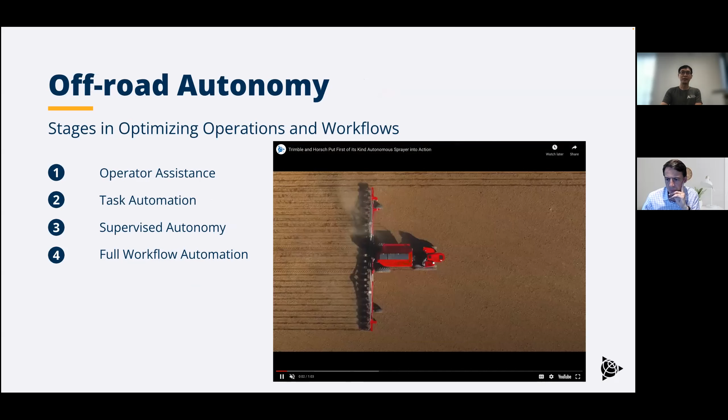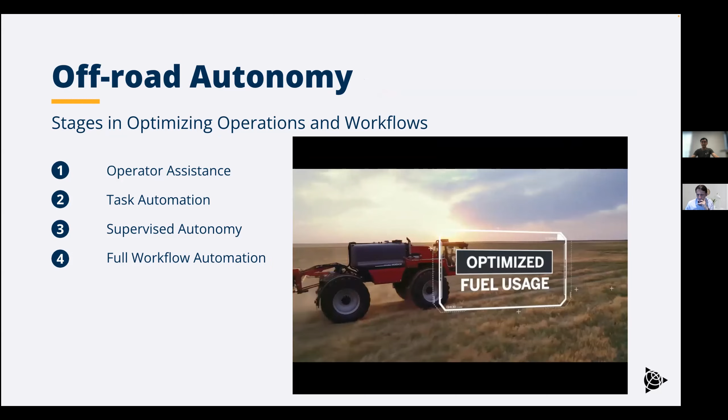So if we look at Trimble and where we stand, we look at autonomy not just from the vehicle's perspective—we like to look at it in terms of the workflow we can provide to our clients. Ultimately, we want to provide value by optimizing operations and workflows. At the bottom level there's operator assistance, which coincides with SAE level 1 autonomy.

Then we get into things like task automation—in agriculture, for example, automated spraying; for construction, automated blade control for grading vehicles. As we go higher up, this is approximately where we're at right now: supervised autonomy, essentially driving autonomous farming or construction vehicles to make the lives of construction workers or farmers easier. Ultimately, we want to tie that into our Trimble ecosystem for agriculture and construction—what we call workflow automation.

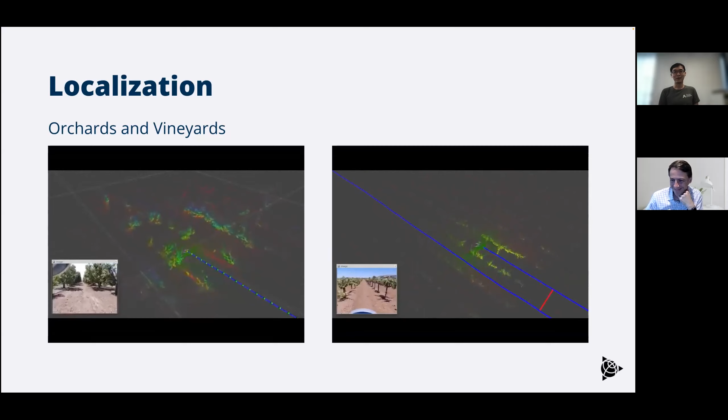So in agriculture, as I mentioned, Trimble has a large presence. My team does a lot of work in localization and perception, and a lot of the videos I'm showing today—I'm trying to avoid showing the corporate marketing videos and instead show you what the engineers are working with and the results we're seeing. My team works a lot on perception and localization.

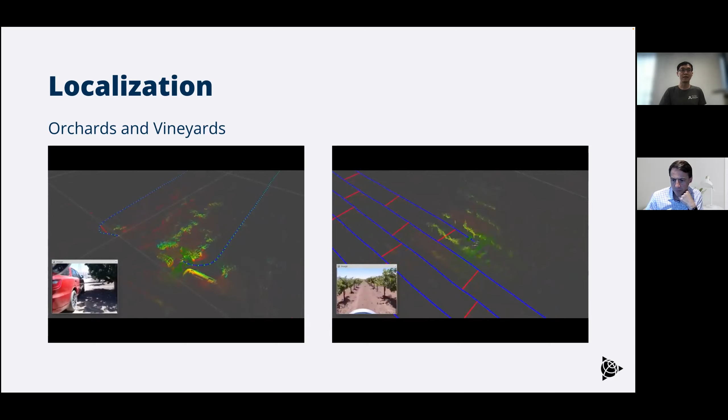We've done some work in orchards and vineyards, localizing vehicles used for spraying in the orchards—a lot of interesting work in California. This is very useful because of the shortage of operators, especially in orchards with high value crops in California, like walnuts. They really want to automate this driving process because of the lack of operators.

Also in agriculture, we're doing a lot of work in spraying large crop fields. Detection of crop rows is something we've been working on, and that's something Trimble has been doing for a while now, based on GNSS. But we want to bring in other perception sensors, such as cameras, as another source of information for that operation.

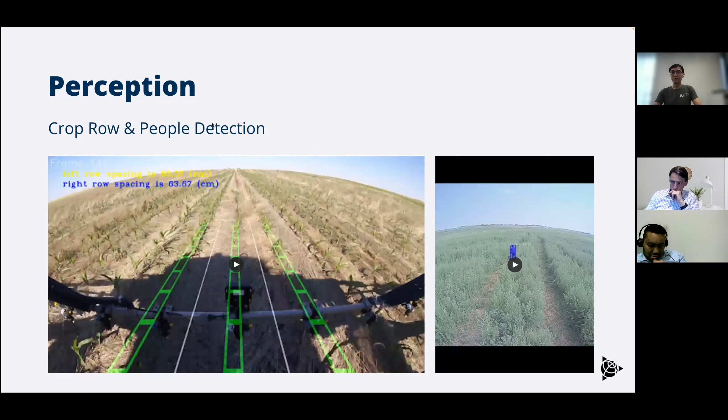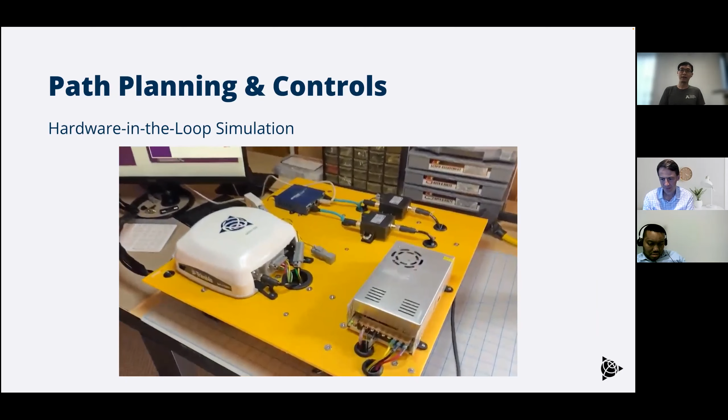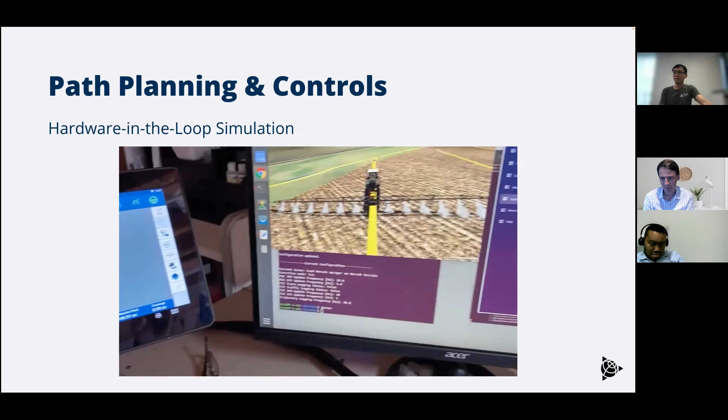I mentioned about the automated workflow, and having an autonomous vehicle integrated into that. This is one of our engineers' workstations. Because of COVID, he brought everything to his house. This is the hardware-in-the-loop simulator we have for our agriculture sprayer. Our work is not only about controlling the vehicle itself, but looking at the entire workflow, looking at work orders that come in that are necessary to fully service a farm.

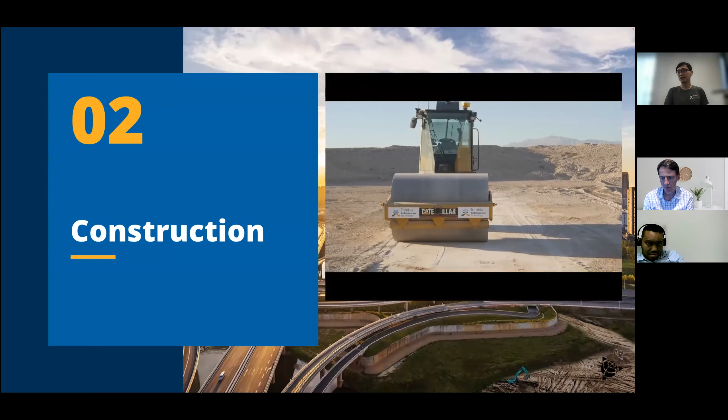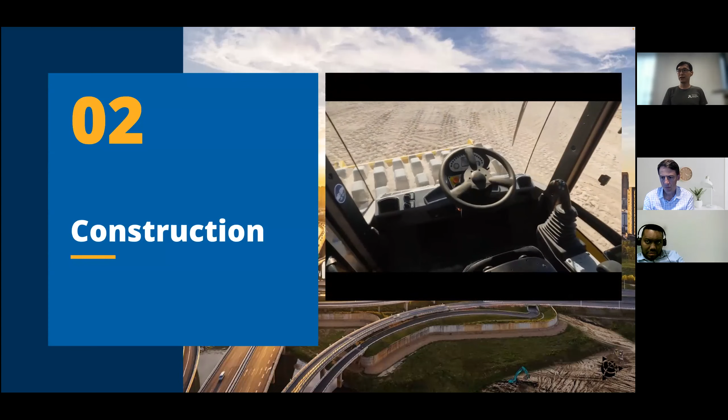Aside from agriculture, construction is another big sector that Trimble is operating in. We've been doing a lot of work on compactors, the vehicles that, as you see in the video here, have different types of drums in the front that essentially compact the ground.

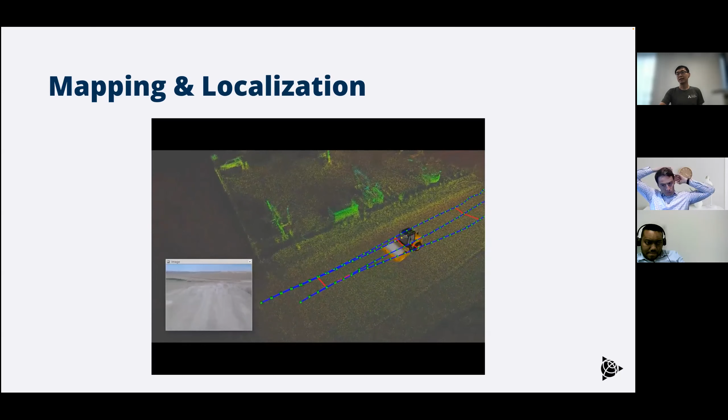Again, we've done work for mapping and localization. In an open sky environment, GNSS works really well, and the reason we're bringing in other sensors is for situations where these vehicles might be operating close to urban environments, under bridges, other infrastructure where that GNSS signal gets degraded. Because these machines need centimeter precision, it's important to get the positioning right, the precision estimate, so that they do their job properly.

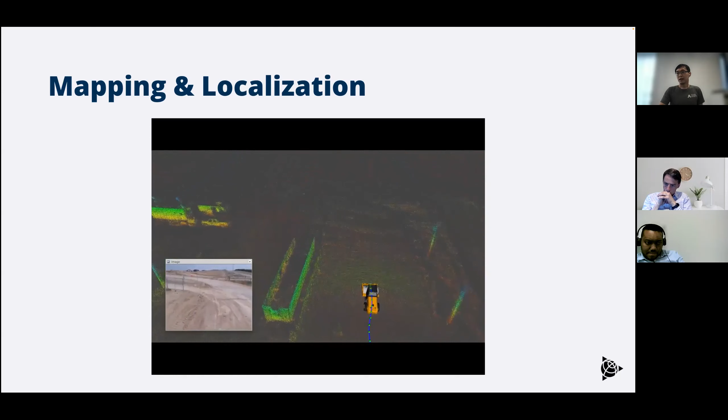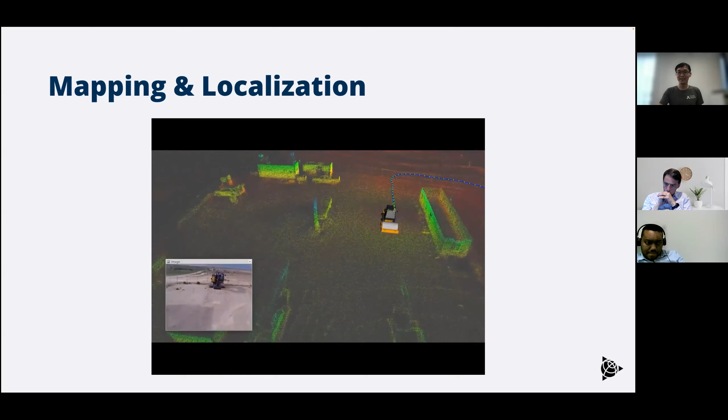This not only goes for compactors, but also grading vehicles. So this is exciting work, it gives us a lot of opportunities to do field deployments on various vehicles. I got to drive one of these compactors and it was super fun. The ride is also surprisingly rough.

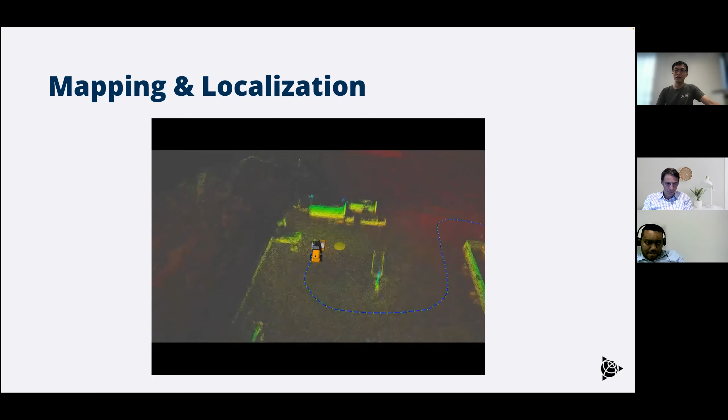One of the problems we have is choosing appropriate sensors to use for these vehicles. If we put a regular Velodyne LiDAR on one of these vehicles, they tend to break down fairly quickly because of all the shock and vibration.

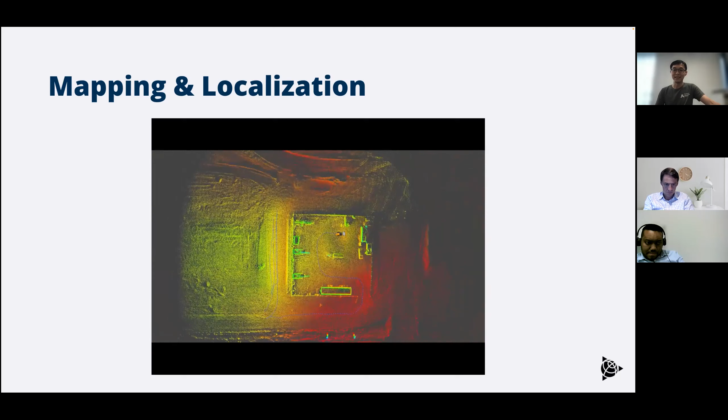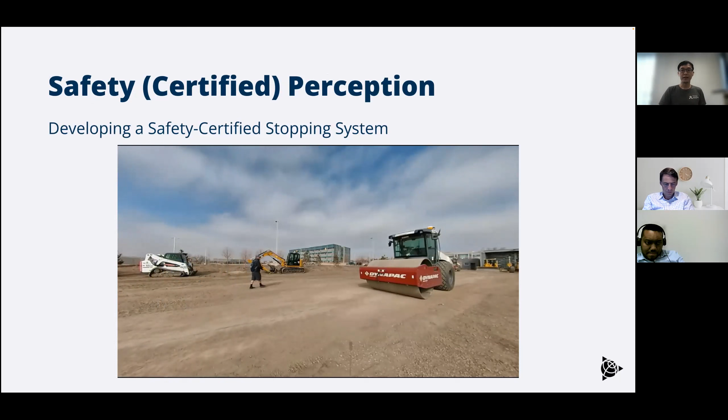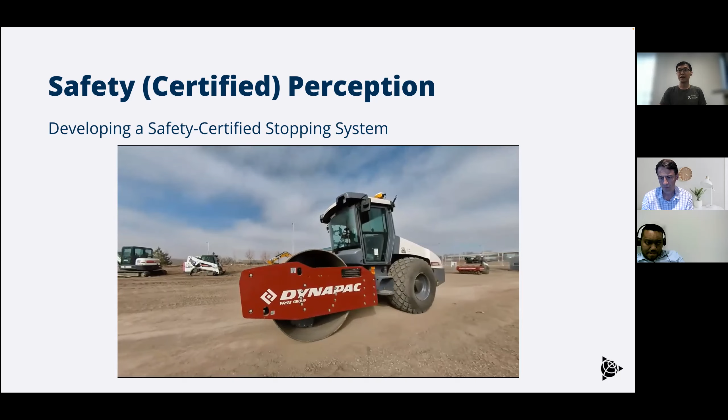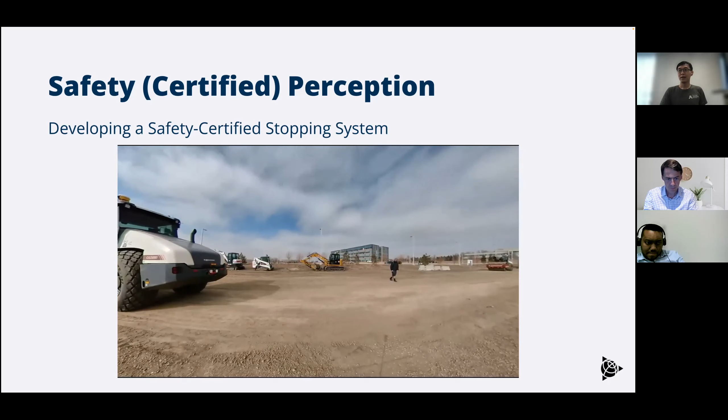One of the big things we're working on right now is a safety certified stopping system for a compactor. This is a radar-based system. On the surface, it looks fairly simple, right? You have a person walking in front of a vehicle, it stops, it doesn't have to do anything else. But the safety certification part is the complicated part. Code has to be written a certain way, analyzed line by line. This is a long process, but it gives our clients some guarantees on the performance of the system, and that it's a system they can trust, and the rest of our autonomy stack can sit on top of.

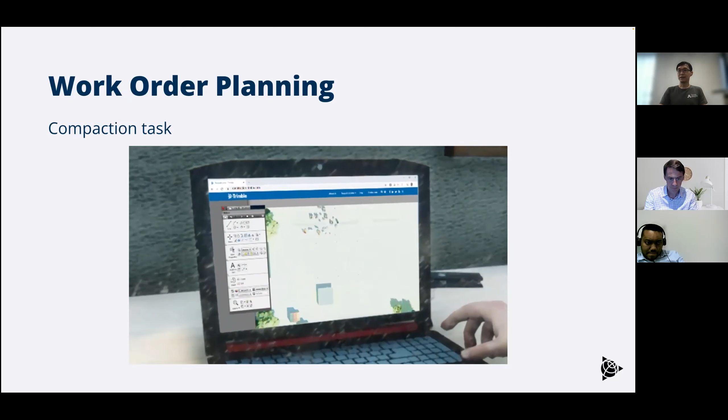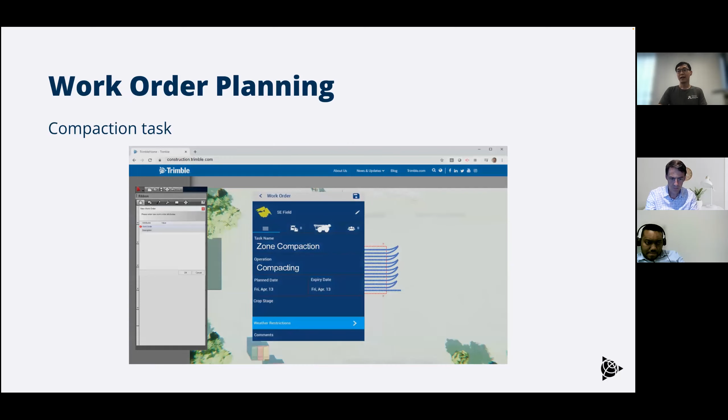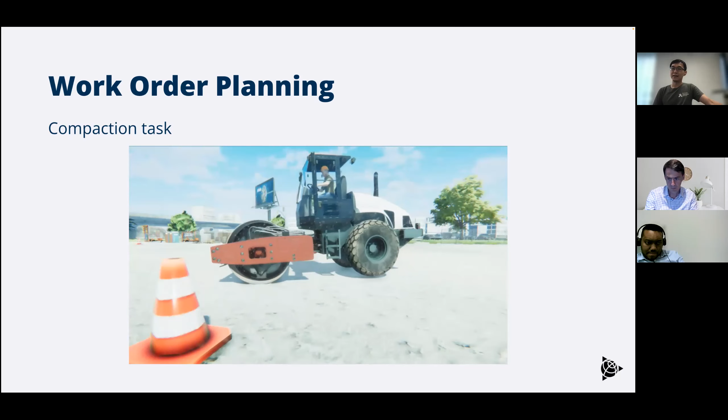So in having an autonomous compactor, what we want to do is connect that with the Trimble construction ecosystem. The idea is having this capability of running an autonomous compactor, have it assign work orders that someone can upload to the machine through Trimble Cloud. An operator can specify a compaction area, and once that's defined, our planning software will automatically plan out the path the compactor drives, and then the vehicle will execute that path.

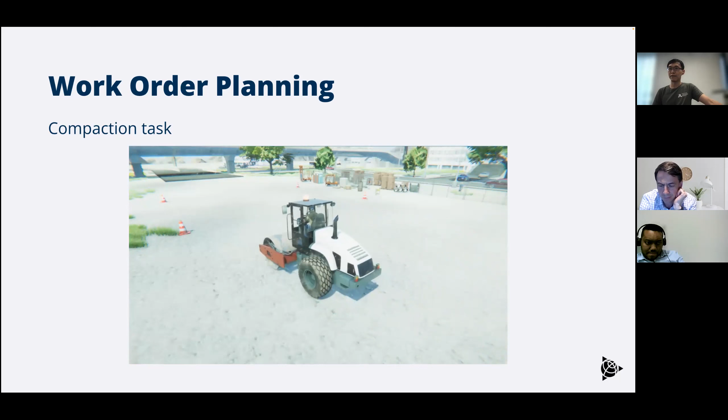Right now this is a simulation that we're running that I'm showing you, but we're also able to do this in real life.

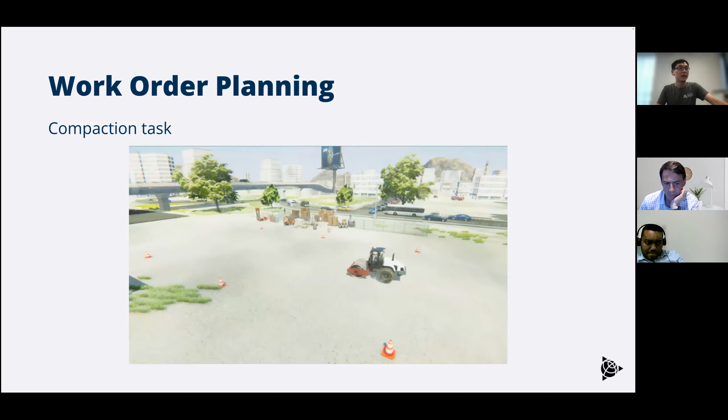Aside from agriculture and construction, we also work with other heavy industries. Mining is an area we're actively working in. Trimble has a joint venture with Caterpillar called Caterpillar Trimble Control Technologies, working on technologies for mining vehicles.

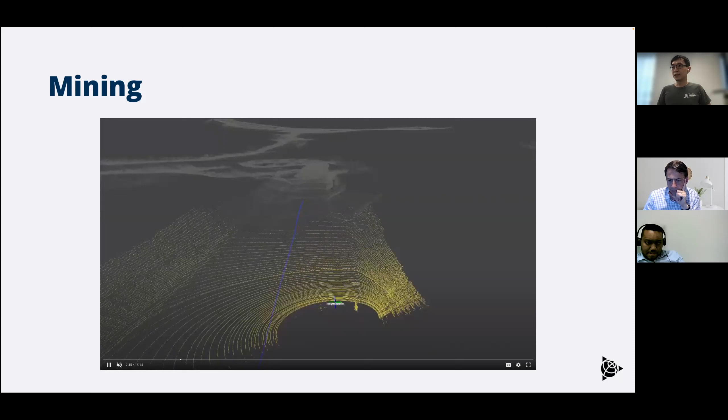Now this video is interesting. It shows you some of the difficulties we experience in open pit mines. We see a haul truck passing on the left side, and we can detect that it's a haul truck and label it momentarily. But because of all the dust that it kicks up behind it, while we're following the vehicle, we actually lose track of it. So this is about dealing with dust and adverse weather conditions. That's something we need to work on.

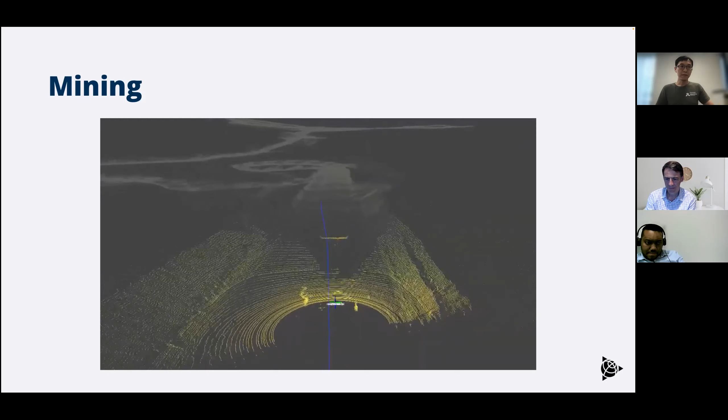Now you might say, why don't we just add other sensors onto these vehicles, such as radar? Part of the problem is when you add sensors on vehicles, on the vehicle maker's side, it takes a really long time for them to certify that sensor for use, especially for a production vehicle. That's a process that can take many years. So we try to work with the sensors that already exist. In this case, it's a 64-beam LiDAR.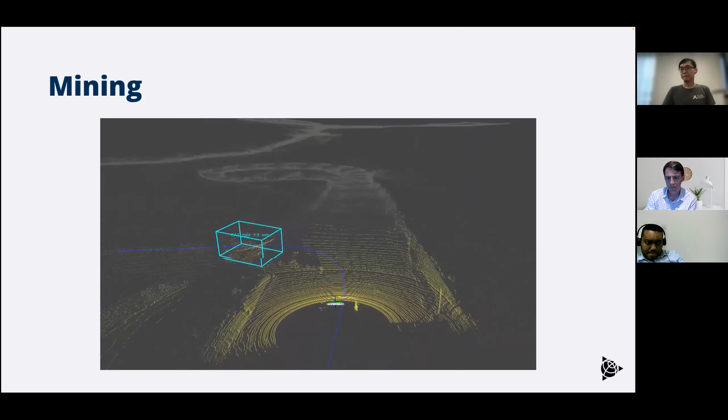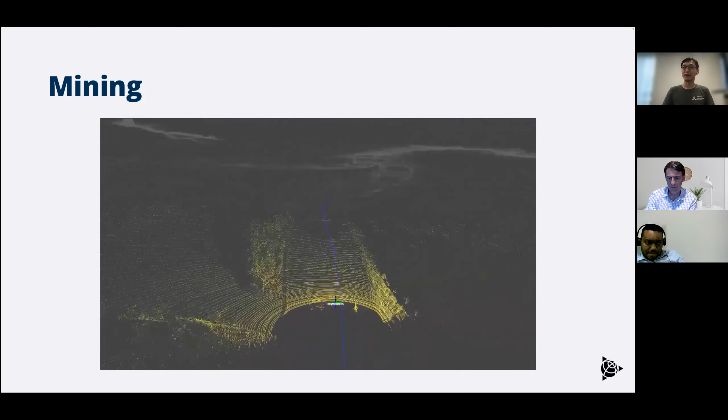So here, as the vehicle comes up from a dust cloud, momentarily we pick it up again, but then as soon as we're following back in its trail, we lose track.

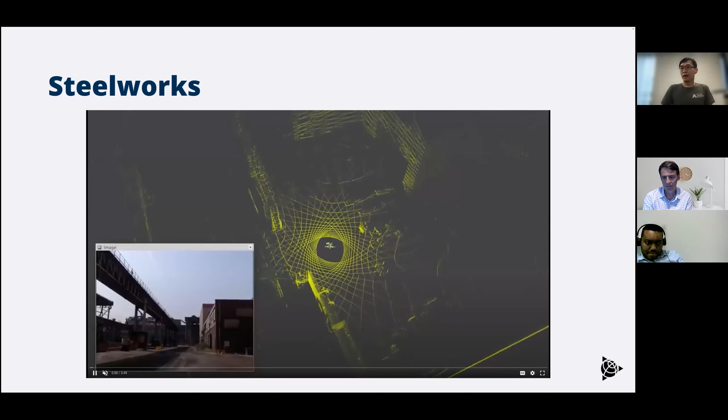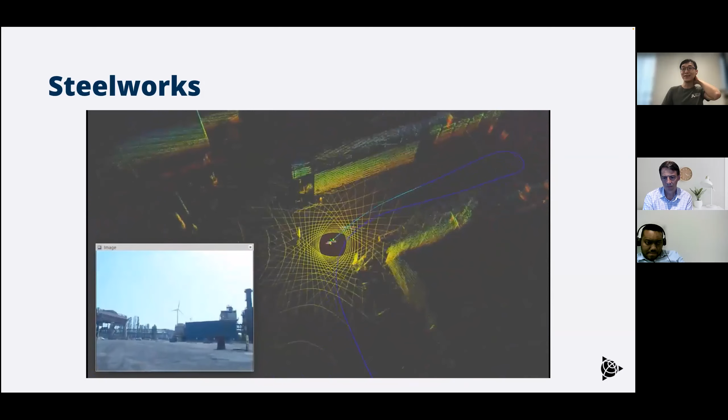Aside from mining, in manufacturing facilities and steelworks, we've been doing a lot of work. We like operating in these areas because it's so well structured and localization works really well. Typically, for LiDAR-based localization, most of the time we can get accuracies of under 10 centimeters.

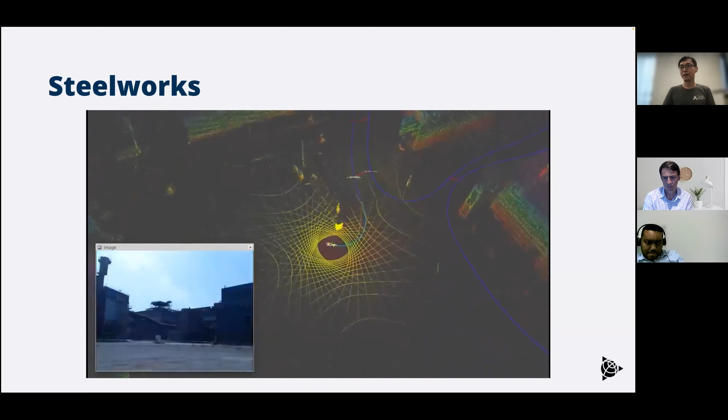About the 50th percentile error is about 2.5 centimeters, so it's on par with GNSS.

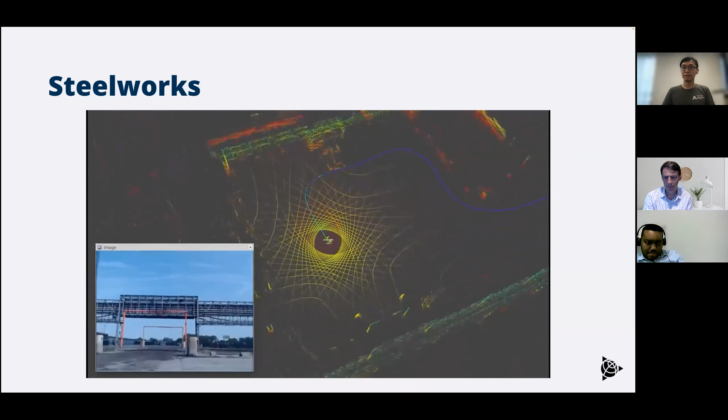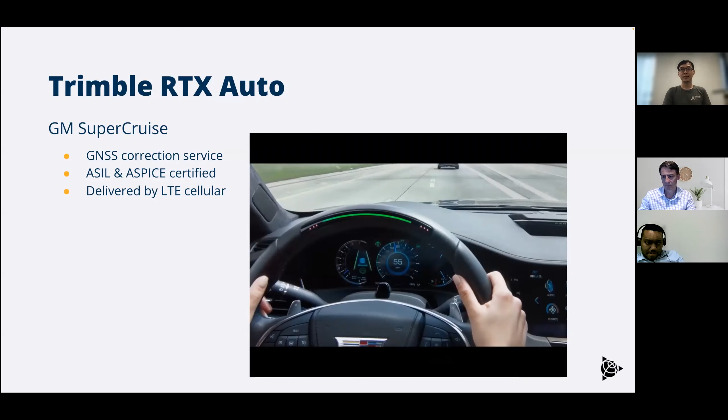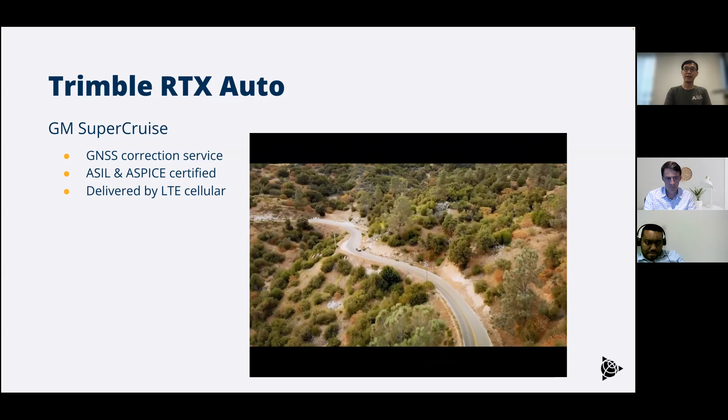So Trimble, although a lot of the work we've shown is for off-road, we do operate on-road. We supply our correction services and GNSS and inertial navigation systems for the automotive market. The GM Super Cruise is a system that uses Trimble technology inside. It uses the RTX correction service, and what's special about it is that it's safety certified, ASIL certified, and it's delivered by this correction service via cellular.

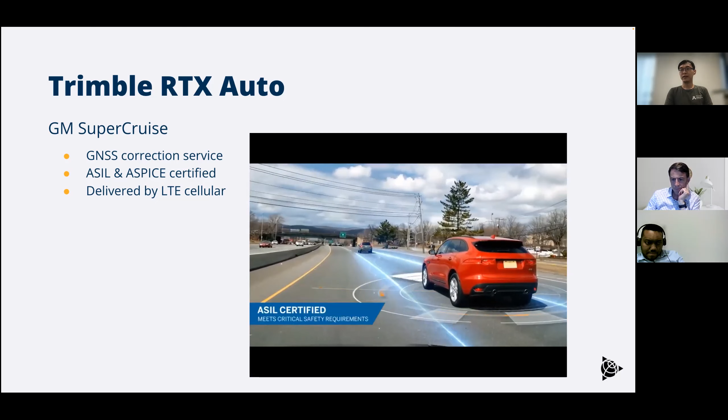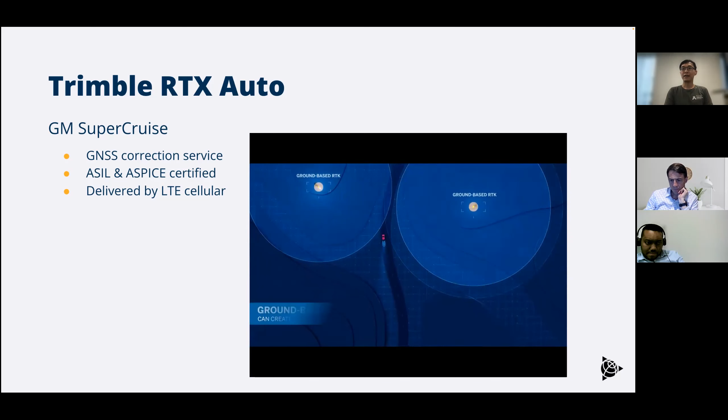So even if you're in an area where you don't have a direct connection to a base station, you still get that correction service. But then, of course, what happens when, let's say, you're driving in a tunnel? That's something else we're working on right now—doing map-based localization for on-road and using that solution as a separate aiding source for our inertial navigation system.

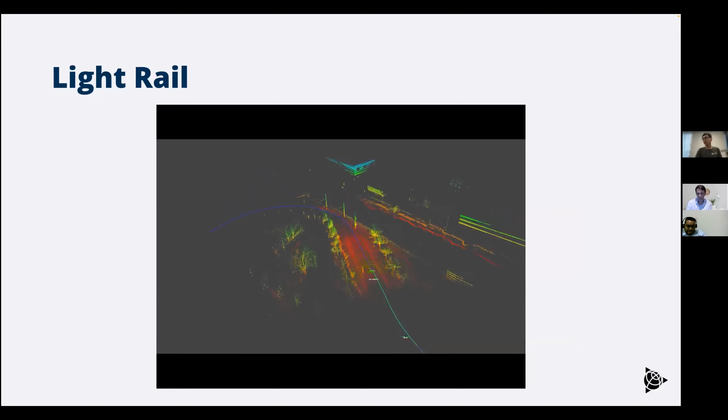All right, and this is the last video I'll show. This is a light rail application. It's very similar to on-road in that there are situations where GNSS signal is degraded, such as when we're traversing between trees in the forest. Signals can get heavily degraded, and this is where LiDAR-based, map-based localization is really useful for us.

All right, so hopefully that gives you a good taste of what we work on at Trimble and what Trimble Autonomy is about.